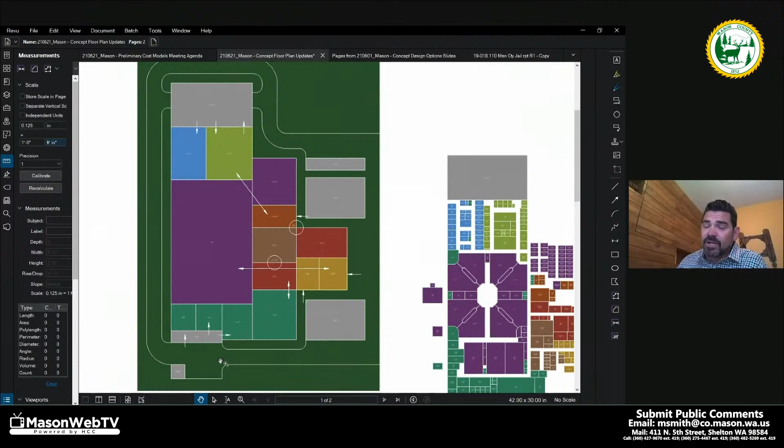And then depending on the site, these would just be rotated or mirrored to accommodate. But essentially, we have our public access coming in and public parking on one side, staff parking on the opposite, staff entry points, and public entry points into the building, whether it's into the lobby or with regard to visiting. We have most of the infrastructure located on one end off of a service entrance that we've incorporated, which would be a loading dock.

So we have a hammerhead driveway that's been incorporated, so semis or large vehicles would be able to come and back in to unload, and then from there take it directly into laundry, into facilities and maintenance, or directly into food service, which is primarily where most of those large bulk deliveries are going to be coming into. And then on the opposite side we have our vehicle Sallyport, which again has drive-through for drop-off. We also incorporate a loop road.

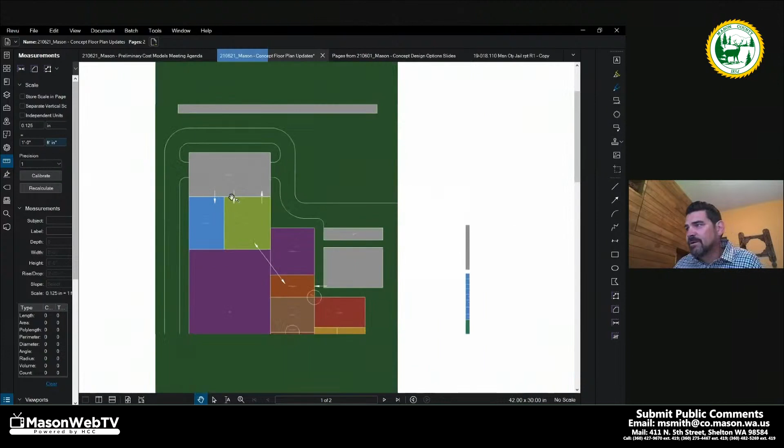And then off of the vehicle sally port we have direct access into the medical and mental health crisis unit, which we have located right here, or into the intake unit, or through the release component, which is located right in here. So everything is directly off of that for efficiency of operations. So that's, again, graphically how the entire building and the site would be flowing and functioning.

Ultimately, we've refined a couple of things with regard to how the plan is laid out with regard to individual spaces. One thing that we really started to look at, based off some discussions that we had with the chief, was how housing ends up laying out and trying to make that more and more efficient.

Ultimately, what came of our discussions was incorporating the radial plan that we've been studying recently, which would be here having 8 units all around a radial plan, and then these little rectangles here would be more of an outdoor rec, so they can organize the higher custody beds around that and service them directly off of that. So there's really no transport, no movement from housing directly into outdoor rec. So that makes for a big efficiency with regard to staffing and movement,

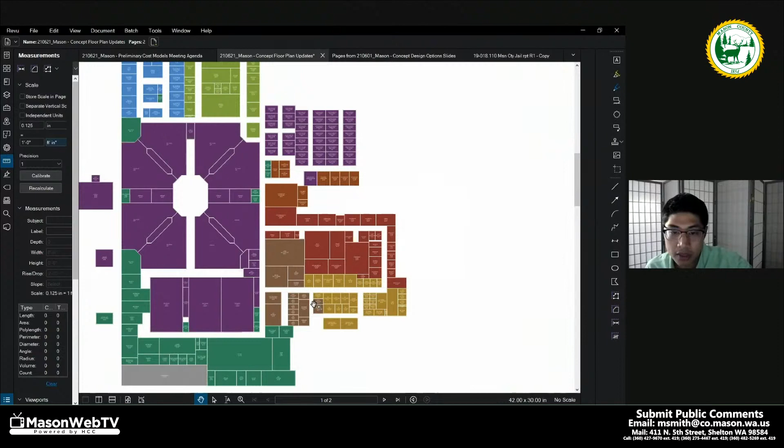For example, this inmate programs block right there shifted entirely down, even though we wanted a direct connection between the cafeteria, the staff cafeteria and the kitchen. So originally we wanted them right next to each other, but because of the way it's laid out, they're still going to have to go down the hallway to get to the multipurpose room or the staff cafeteria. Right. So things like that.

And then if we go to the front lobby, the vestibule area, the bottom right. You're right here. Yeah. And so you would think about how a visitor comes in, how they would interact through the entrance, through the lobby, the receptionist, and then where they would be going, whether it's non-contact visit or the visiting alcoves, which are all just going to be out in this front area.

And then if you're an attorney or have the contact visit interview rooms, which are further down, I created this C-shaped hallway along the back, this loop, so that inmates and visitors aren't crossing paths. Okay. And then any attorneys would be able to come back and access the video courtrooms to support the client and interact with them.

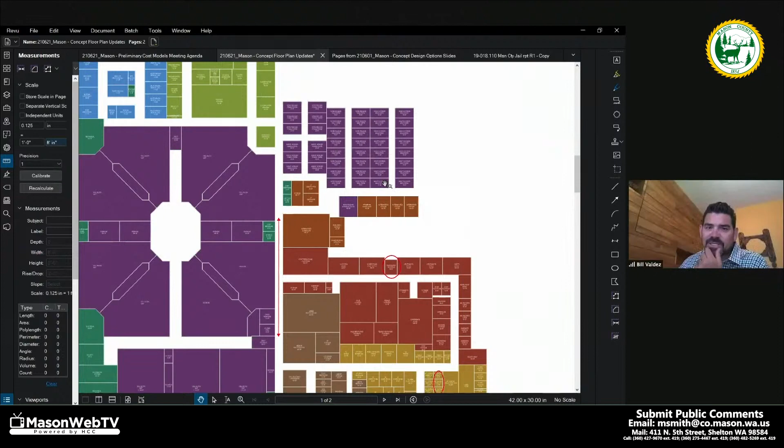And then the work release and the inmate worker dormitories. Those are still just showing the individual bed areas, but they will be laid out a little differently into kind of single units. Currently I just showed the blocks of the sizes and the circulation. Yeah. But generally you would have your dorms along one side and then the offices and the alternatives offices along the other side, preferably with windows.

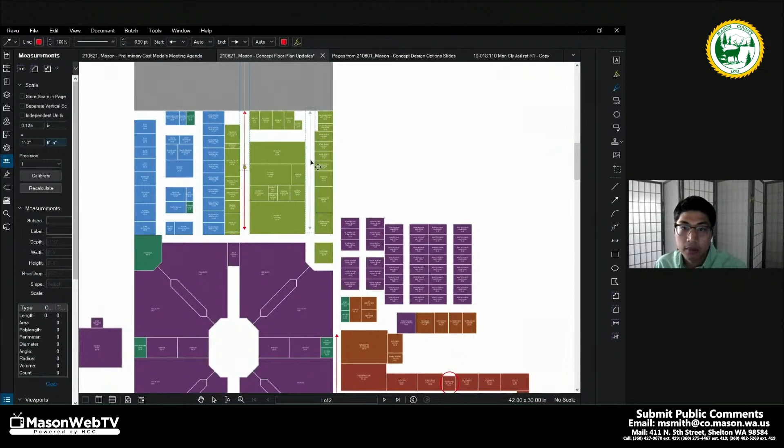And then intake and release. We have the two corridor setup where you have intake and booking on one side and then release on the other. And then your property and your booking counter is centralized within the middle, kind of shared functions. And similar with the medical unit, I got all the cells along one side and then the exam rooms and supervising offices on the left.

So again, all these are set up. As you can tell, there's a lot of corridors, but it allows for ease of operations as well as efficiency and safety. Essentially there's an intake path where everyone's coming up this left-hand side, and a release path where everyone's going out of the facility through the right-hand path. There's no cross-contamination, which eliminates any issues with regard to security or transfer of contraband. And then here, a really efficient circulation loop within the medical clinic area, so it's very easy for nurses as well as detention staff to do bed checks and observation checks of everybody within the medical unit.

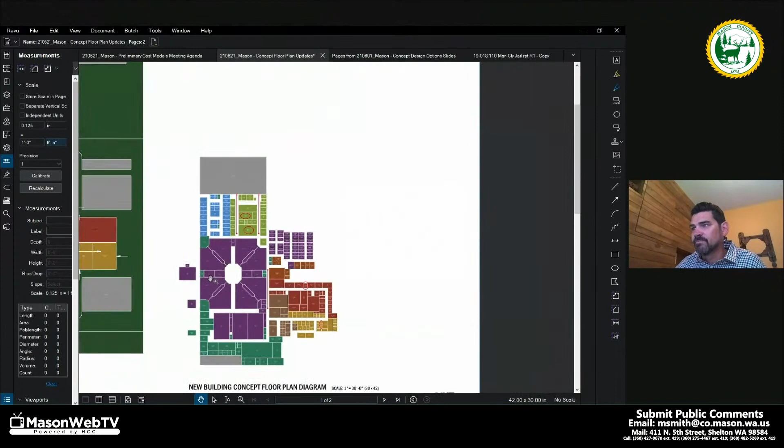I think that's about it. We still need to go in room by room to delve into the details with Chief Anson and see what program spaces really need to be next to each other, how the staff function, how they have inmates transporting back and forth and how they actually use the space. And that'll affect a little more of how we lay out the program and massage it. But this was really just the draft concept floor plan where you take all these blocks on the left and turn them into the actual spaces.

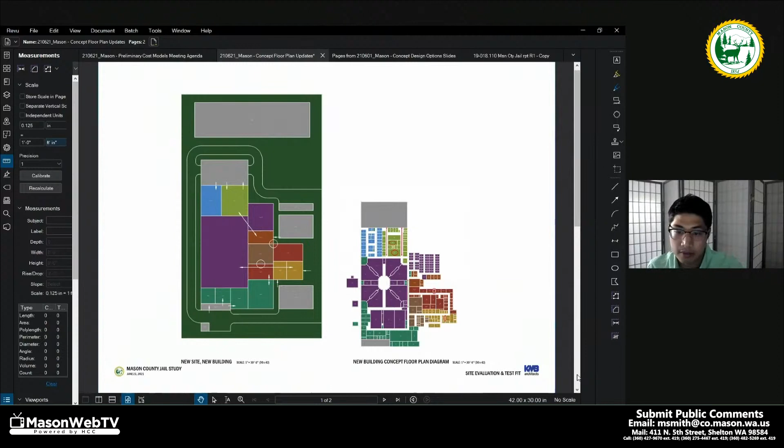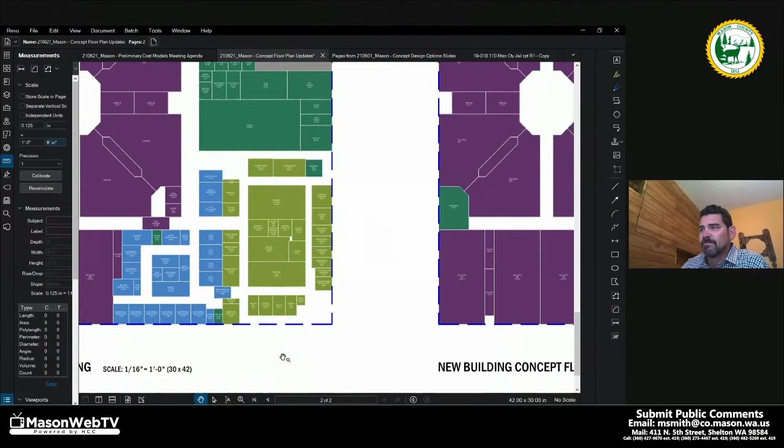And so booking and medical need to be part of phase 1 to be able to make sure that this is a fully functioning and operating facility. With this plan, we still are looking at using the area just to the east side of the district courthouse as being used as both that connection to the courthouse, but also as the vehicle sally port for access and delivery of all in custodies to the facility. So then being able to still have that inbound intake and then outbound release corridor, still having a loop corridor as well as an access point here out to the sally port for the medical component.

And then all of the building support and inmate support functions are all clustered here at the center of the building, which also would all be part of phase 1. So we have our kitchen component, which has all of our coolers and freezers, our storage, wash area. What we've been able to incorporate into here would be a loading dock directly off of the street. So we'd be able to have large vehicles backing in and from this location have direct access into the kitchen area, into laundry, and into maintenance.

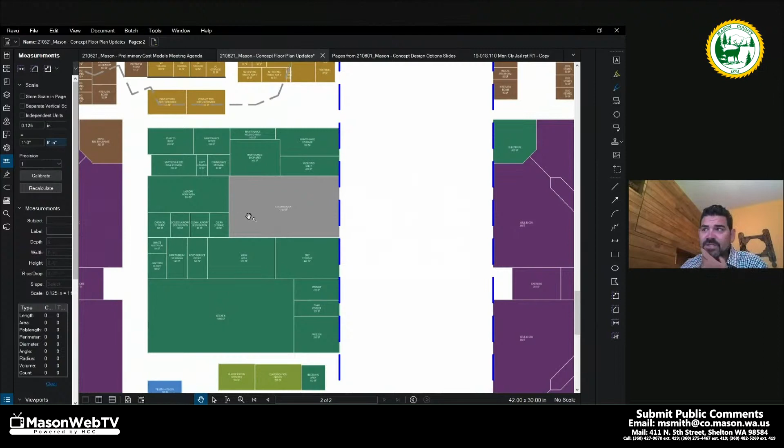So again, we have some real efficiencies with regard to the bulk deliveries coming into the facility. We still are working through and massaging access and movement in and around all of those, but it's starting to come together pretty well. And then here in phase 2, this is where things get, again, a little bit unique. And I'd like to point out, Bill, too, that on both options here, whether or not we demolish the existing building or reuse it, phase 1 is essentially going to be the same for both, because we're still going to need to move over and have a functional jail after phase 1.

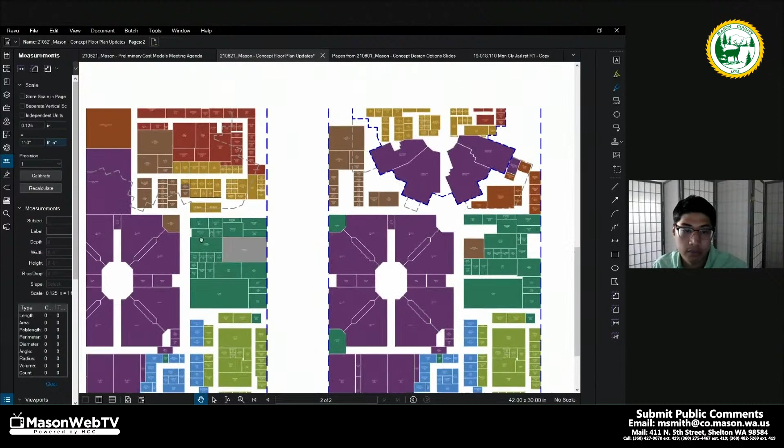So the biggest difference between these two is in this option, we end up creating new alternatives housing dormitories. In this option, we end up converting or reusing the existing housing units of the old jail and repurpose and modify them to be for our alternative housing. So at least we're able to reuse some of that infrastructure, but working around, as you can see, this fairly unique shape of a building, there ends up being a lot of white space, which is going to be void space or circulation space. That is really where it starts to become a little bit more difficult to make those connections in a very efficient way. That is the next step that we'd have to continue to work through on this alternative.

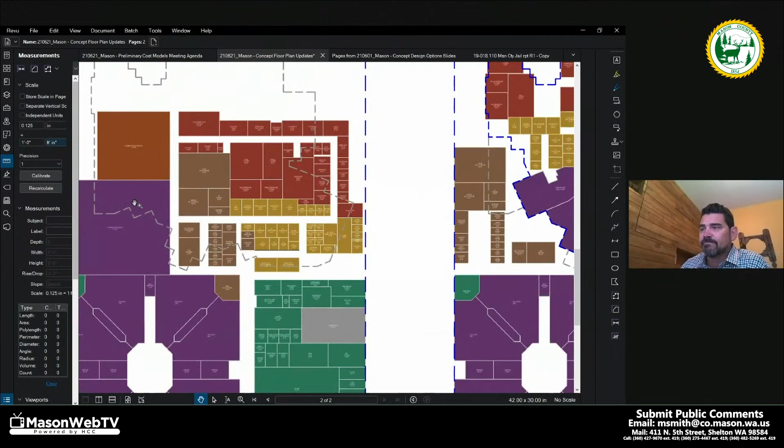And then, as you can see, we actually do have quite a bit of space. So how we position these blocks on the site, we do have some flexibility to slide the building further to the north if we want to have a tight connection to the historic courthouse, or place it a little bit further away, creating more of a linkage to that and more of a buffer and a space away. Again, this might be some opportunities, no matter how we end up sliding and moving that around, to develop and find locations for the 40,000 cubic foot detention vault. So there are definitely some opportunities with how we ultimately want to position this.

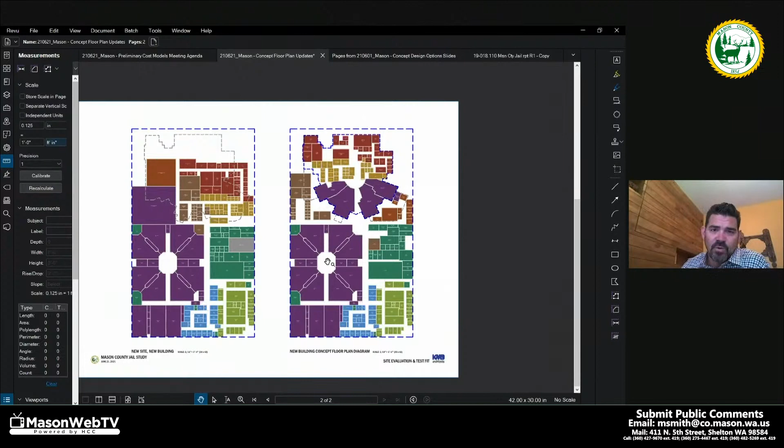But those were the main things that we were studying and looking at based off of our conversation a couple of weeks ago, as well as part of the staffing plan that we talked with the chief about. And ultimately, we need to revisit this a little bit on the operations side to see if, based off the layout, the flow, and the function, the staffing plan that we're applying to the other three options would still work in this configuration, or if there's going to be a need for some additional staff during certain shifts. So any questions with regard to the plan alternatives, or how they would be deployed on the existing site?

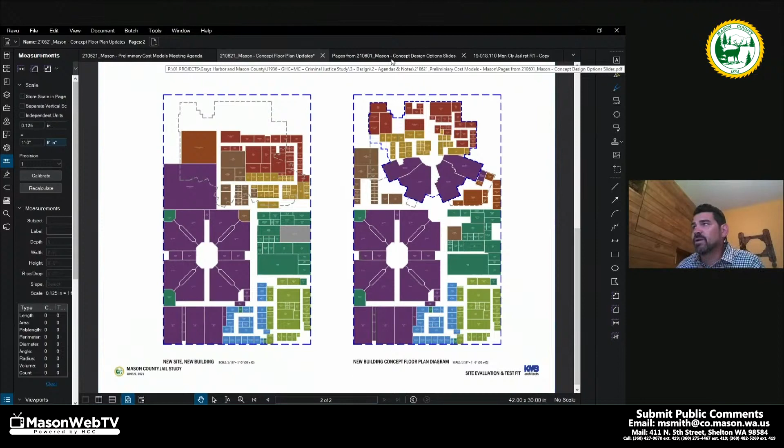Okay. So with that, we wanted to roll into and talk about cost options. Oops, let me get to here. So JMB Consulting Group is our cost consultant.

They have prepared this preliminary rough order of magnitude cost analysis based off the information that we have at hand. There's still multiple questions that we need to answer and refine. But these are really based off of the information that we have on hand, the square footage, the different systems, the size of the systems, as well as all the offsite utilities that we had as of last week. Some of that, as Brian presented, has been constantly evolving, including really the distance that we actually have to some of the utility connections at site 1.

But some of the assumptions that we made with regard to all of these: we need to know the square footage, the size of the facility, to be able to do a cost model. Second, we need to know when. So we had to pick a date and time to pin the construction costs to. And so we made an assumption of a start date of April 2024. So this would be the end of the first quarter, beginning of the second quarter of 2024, just to be able to apply a certain amount of contingency and construction cost escalation, so we'd be dealing with at least some level of numbers of reality.